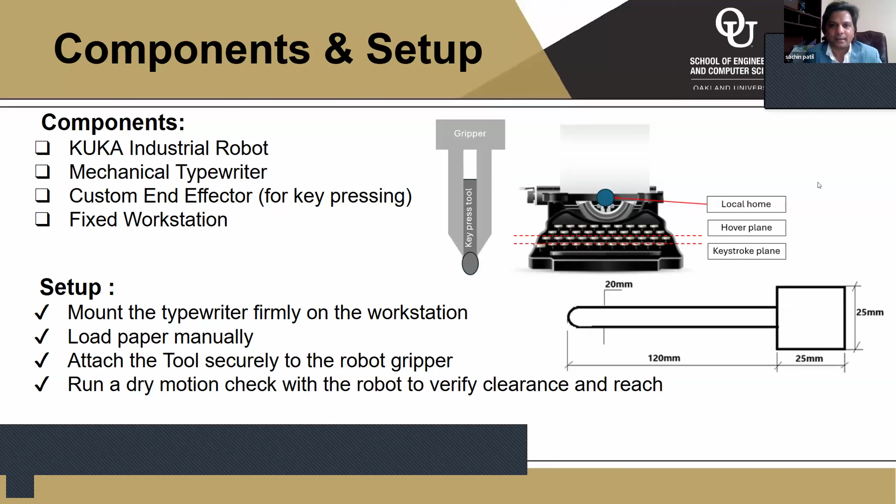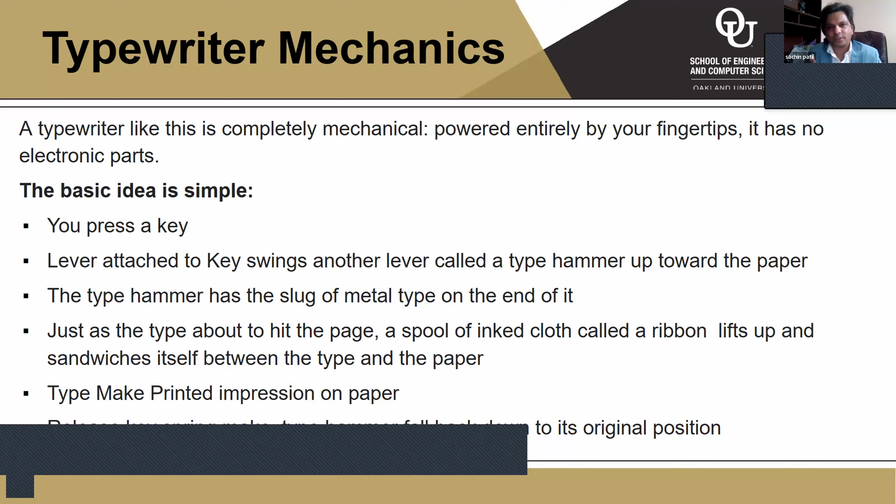Workflow: secure the typewriter on the workstation. A good thing about the typewriter is its self-weight, so it's very stable and we don't have to add any additional clamping. Then align the typewriter — on the workstation, it's very important to align and position it properly.

We use two metal blocks on the workstation which are exactly perpendicular to each other as a datum, and we position the typewriter across these two blocks which are already there on the workstation.

We mount the tool on the gripper and test accessibility, checking whether the robot can move through the complex positions across the typewriter.

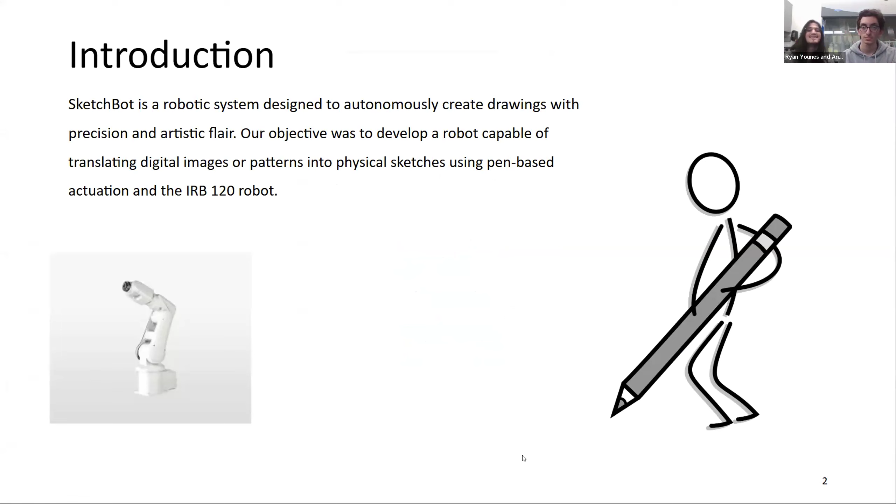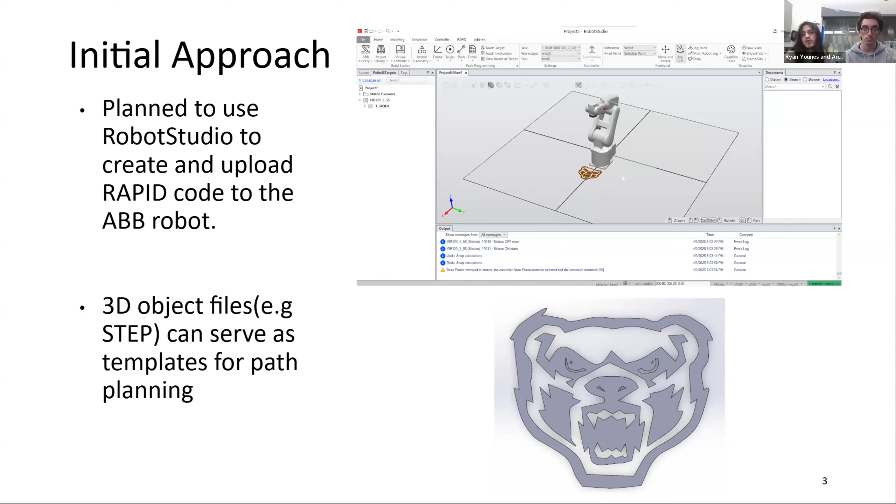One of the most useful tools it offers is the AutoPath tool. So using 3D objects, such as the grizzly bear shown in the bottom pictures, you can trace the edges of that object and create a path out of it. You can control the zoning and the velocity of that path. In our example, this was a 3D step file that we used. So using Robot Studio from the ABB company itself, we're able to create some paths, and as you can see in the simulation results on the right, the robot is able to trace the outer edge of the grizzly while keeping its configuration stable.

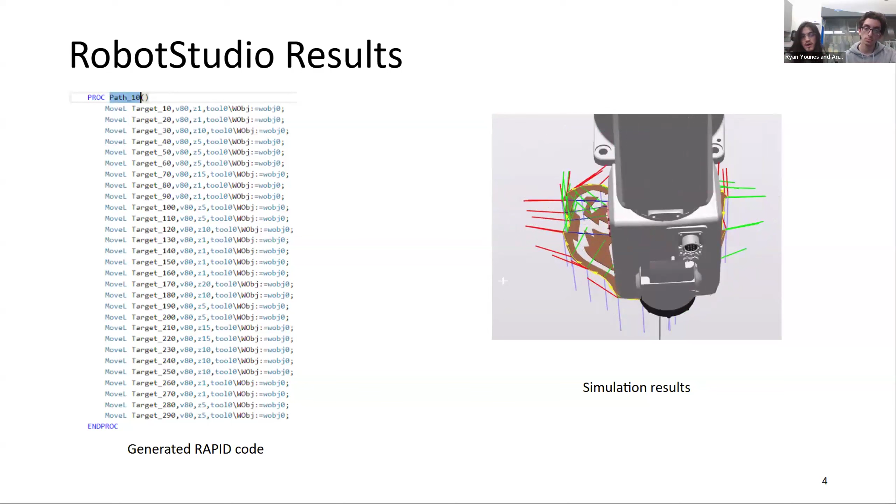I should mention that Robot Studio has multiple models, and you can also attach different tools to the robot at the end frame itself. The picture on the left shows the generated code for this one particular path on the outer edge. You can see it's about 29 points just for that one outer path, and it has a bunch of settings, I can control all the velocities and the zoning on it.

I should mention that although this did work in our simulation in a virtual controller setting, we had a bunch of problems trying to upload it to the actual robot in lab. We connected to it with an Ethernet cable and were able to upload the code. Trying to launch the code, we had to go through a lot of hoops, some of which the TA was able to help us with. When we ran it, we encountered a lot of issues with singularities, which we were somewhat able to mitigate by changing where the path was actually located physically on the workspace.

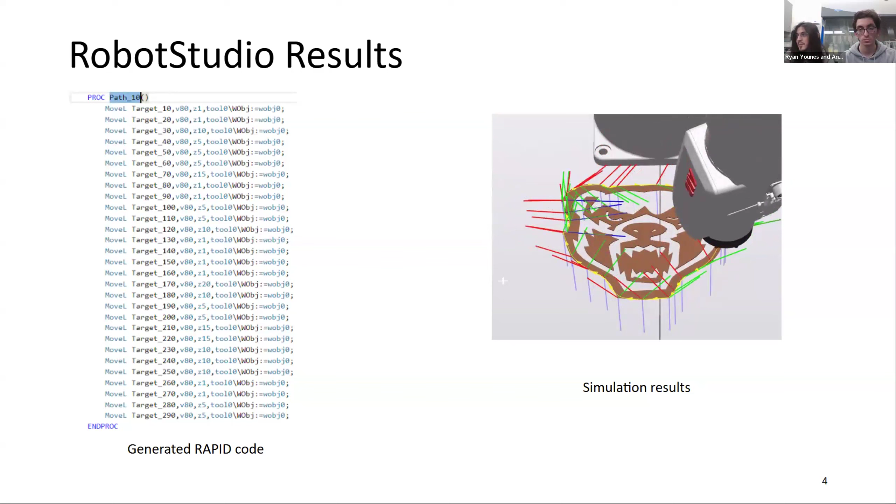However, as the robot was following the path we gave it, it was flipping in orientation a lot, even though the simulation results indicated it would be stable. We think this is most likely due to us not calibrating it correctly with the tool frame, which we weren't quite sure how to do. We had to make a decision, which was to essentially scrap this idea of using Robot Studio to trace the actual object we wanted to trace. Ryan will talk about what we did after we scrapped it.

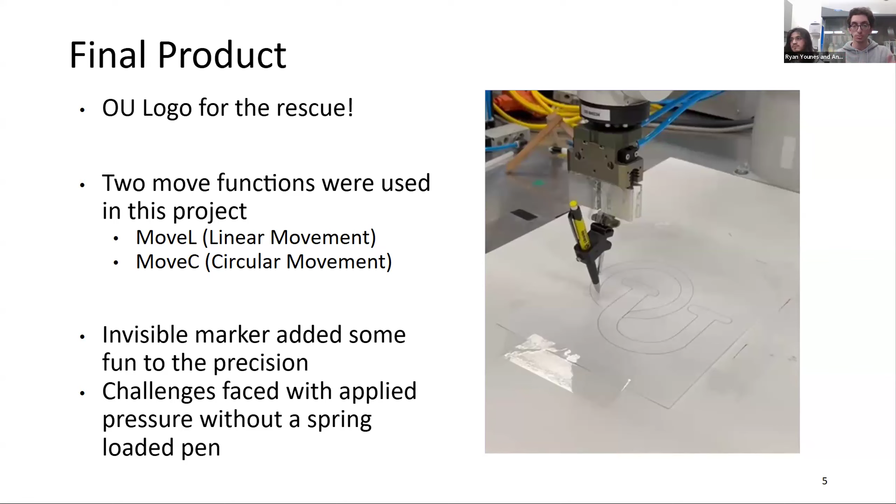So the two main functions used to draw our Oakland University logo were move L and move C. Move L is the linear movement and move C is the circular movement. Move L only requires one point in the code, which just tells the robot what point it wants to move to, and it will take a linear path to that point. Move C requires two points: the second point being the end of the circular motion, and the first point determining whether our circular motion is clockwise or counterclockwise. So if we put it to the left side, it would be clockwise; if we put it to the right side, it would be counterclockwise.

We also ended up adding an invisible marker at the end, just as a fun thing, to showcase the precision of our robot. At first we wanted to do that using the robot as well, but unfortunately our marker was not spring loaded, so we ran into applied pressure issues with the robot—sometimes it would lift off the paper slightly and not apply enough pressure, and sometimes it would apply too much pressure and rip the paper apart. So we ended up deciding just to trace where the OU logo would be based off a previous run we've had.

The robot was placed at an idle position at the beginning, and from that idle position we use a move L to move to the starting point on the paper so that the pen is touching the paper. From that we use different combinations of move C's and move L's to draw our OU logo. At the end, once we were done with our OU logo, we made sure to have our pen lifted off and placed into the same idle position again. That was pretty much it for the flow of our robot.

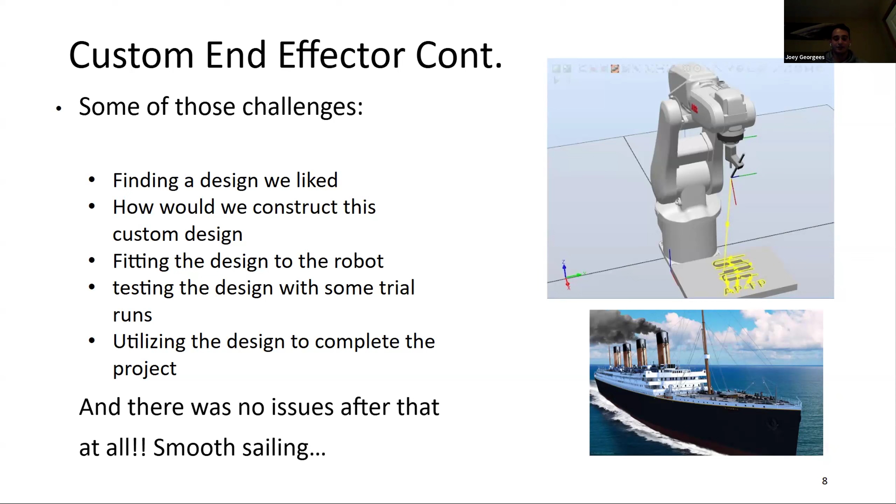As you can tell, it flowed like the Titanic that we decided to include. Just kidding — just like the Titanic, it crashed and burned. Thankfully, nobody drowned at the end of our project.

So the first issue we ran into was attaching the end effector to the robot. The end effector currently attached to the robot is a hydraulic controlled robot gripper, so to remove it you would have to remove the hydraulic lines attached to the robot and reassemble it after we were done. We didn't know how to do that, so we decided not to execute upon that because we couldn't put it back together, and we didn't want to affect future users of the robot or mess it up in any way.

The third issue was actually figuring out how to fix it and execute it. Thankfully, we ended up MacGyvering the situation using a hot glue gun and some tape to reattach it and finish executing the project.

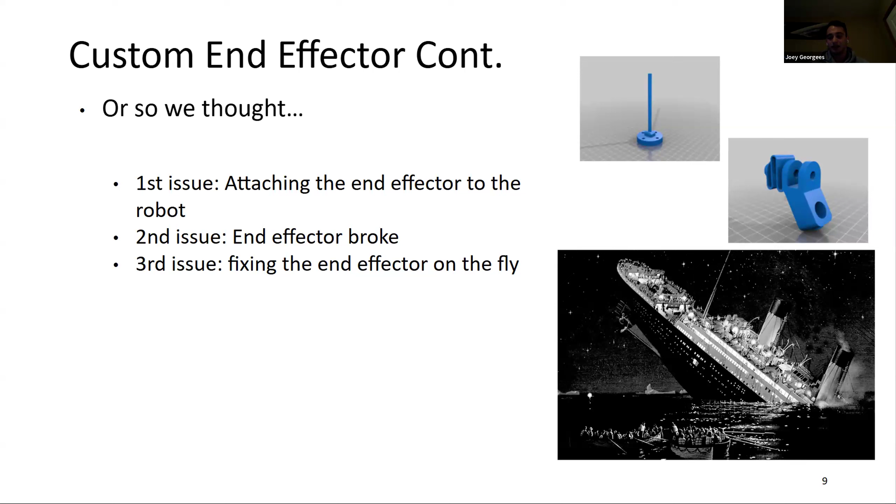So in conclusion, what was the point of all this? For the group as students, we wanted to test our knowledge of robotics so far by applying our knowledge throughout the course, as well as expand upon that by using things outside of the box.

For example, we knew how to code a robot, but we didn't know how to use the software that we decided to use, or use a custom end effector. So we also wanted to put existing ideas to the test.

As we have all learned through the course, robots are really good at doing the same thing, but what challenges actually come with that? If you execute the same code multiple times and iterate upon it, what issues would you run into? What issues would come up with using code? What issues would come up with using end effectors? That was another thing we wanted to put to the test, and some food for thought.

After executing the project, we encountered challenges that may affect others in broader industries using these robots. The closest industry we can talk about is the car industry, who use these robots 24 hours a day, 6 days a week. There are many different kinds of these robots, spot welders, grippers. They are all executing the same code over and over.

Well, what if you wanted to change up what you were making? You came up with a new design, how easy is it to change it? Is it easier to use the actual pendant, or is it easier to use code? If you wanted to change the end effector because it wasn't working as intended for longevity, how would you do that? What material could you change? And what can you do to avoid these issues? And how can you improve the process by cutting down the time and also creating more product?

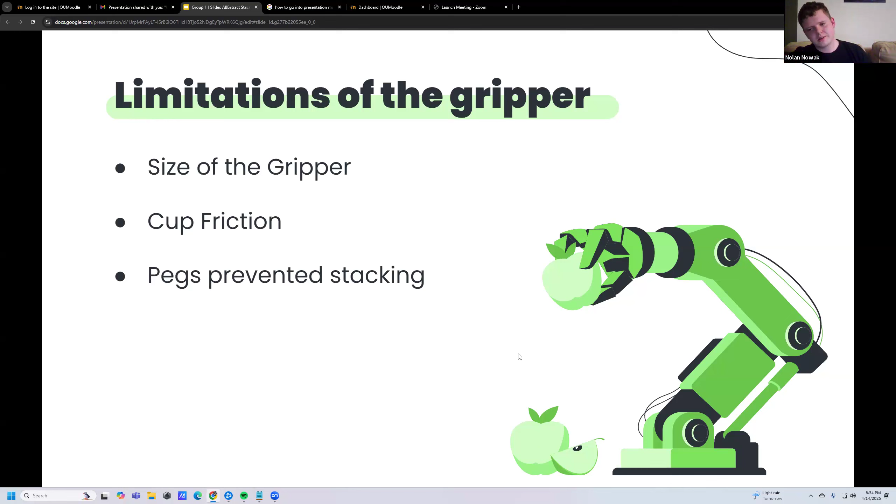To start the loop, similar to group 10, we used many MoveL commands, which is just a linear move from one point to another. Anytime we wanted to use the gripper to open and close, we used a SetDO gripper command, either 0 or 1, depending on what we wanted it to do.

Then we ran into an issue, discussed later in the presentation: for whatever reason, the gripper was closing before it reached its desired point. The solution was including wait time commands, basically adding a delay so the gripper closed when it was supposed to. The last part of the loop was stacking the cup on top of the tower.

Up to this point, it was all very repetitive, a lot of the same movements. Then for the pencil, once again more MoveL commands, a SetDO gripper command to pick it up, and then more MoveL commands to stick the pencil between the gaps, eventually pushing the cups down and stacking them.

After this occurs, the program ends and the end effector goes back to its home position. So if we had more cups off to the side, we could reload them, put them in their home positions, and it would keep going.